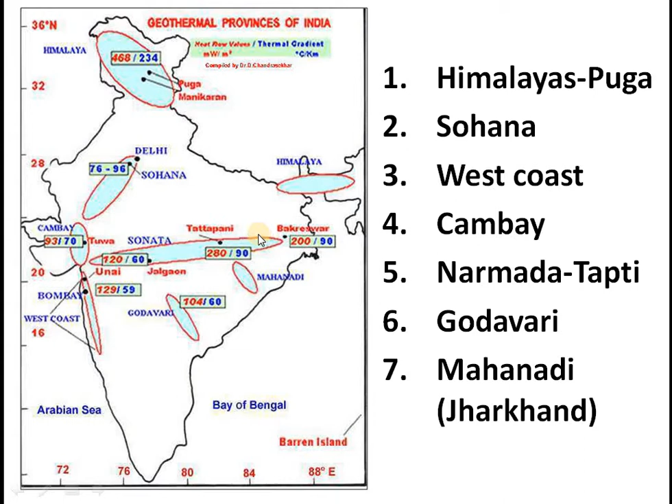And we have Sohana in the Rajasthan region, Rajasthan Maharashtra border. And West Coast is again in the Maharashtra Arabian coastal belt. Cambay lying in between Gujarat and Maharashtra, and this is a bay actually. And the Narmada Tapi region, that is shown as Sonata here, and the Godavari region, Godavari Valley lying in Andhra Pradesh, and Mahanadi in Jharkhand. So these are some of the areas which are very important from the geothermal point of view, and it is shown here more clearly.

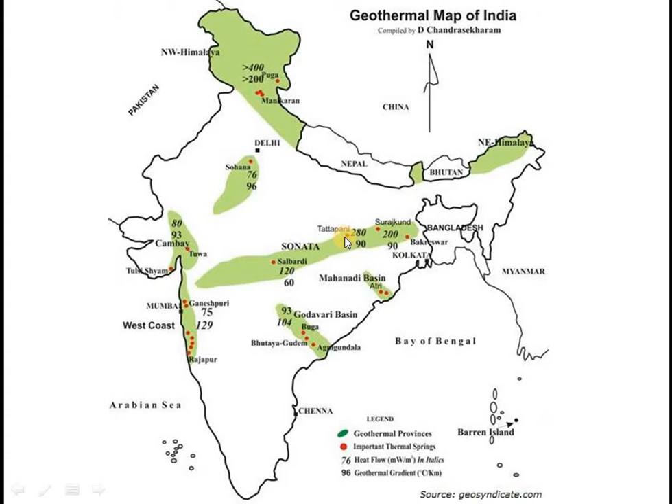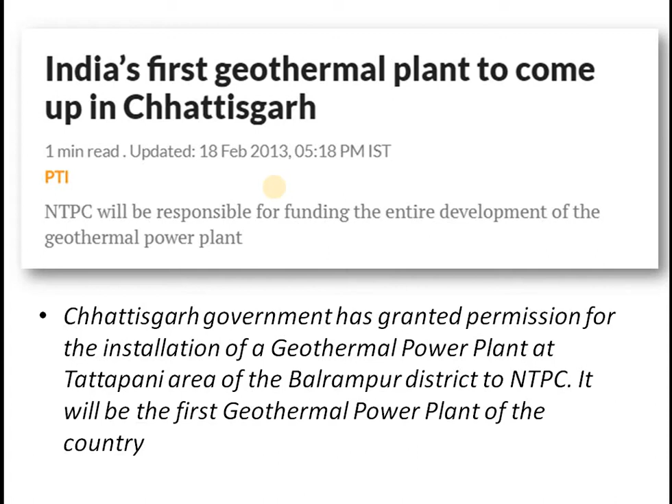And the most important one is in the Ladakh region, Himachal Pradesh area, and in Jharkhand also we have very important, where potentially one geothermal plant is shortly coming in Chhattisgarh. You see, India's first geothermal plant is to come in Chhattisgarh. Chhattisgarh government has granted permission for the installation of a geothermal power plant at Tattapani area of Balrampur district to National Thermal Power Corporation. And it will be the first geothermal power plant. It is around a 600 megawatt project, a very huge one, and the working is underway now. Likely to be finished in the next couple of years. That will become one of the major prestigious geothermal power plants. So that is interesting news for us.

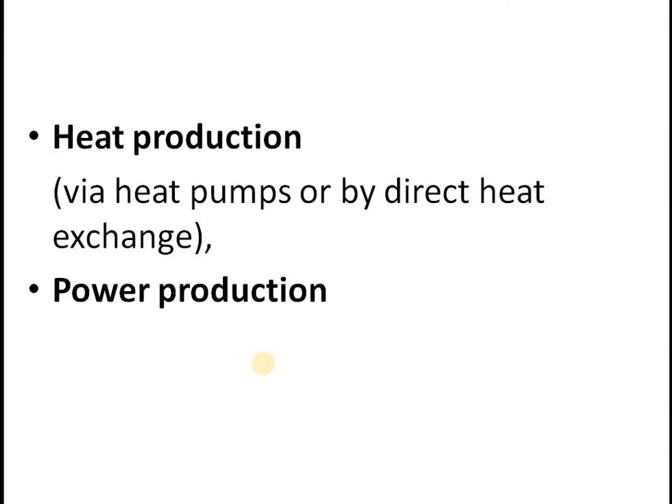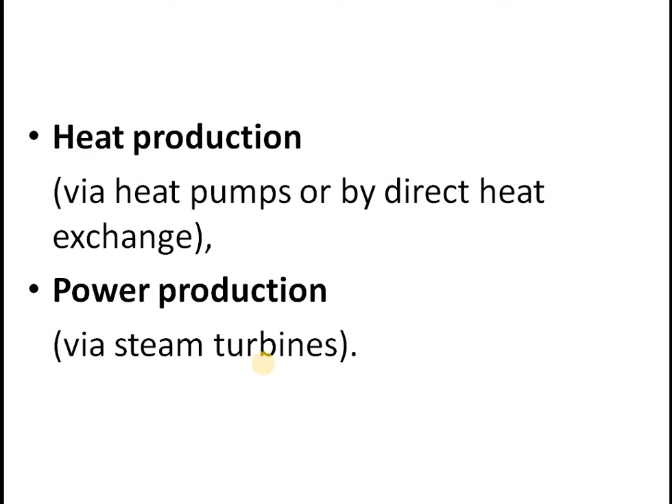Now come to the application part of geothermal energy. Broadly, you can classify the applications of geothermal energy into either heat production for various applications other than power production, and secondly the power generation. So heat can be used in different ways other than power production. Okay, so broadly we are classifying the heat production purpose, and that heat will be used for many heating applications other than power generation. And in power production, we will be focusing on the turbine rotation basically.

So the geothermal energy, basically you can classify into three categories from the heat point of view. Very low enthalpy geothermal resources, where the temperature is less than 40 degrees, which normally we find in most of the Himalayan regions in pilgrimage places. Then low enthalpy geothermal resources, where temperature ranges from 50 degrees Celsius to 80 degrees Celsius, and we have high enthalpy geothermal resources where temperature may cross 250 degrees Celsius, which we normally use for power generation. Okay, the other two categories we make use of for various domestic applications.

For example, very low enthalpy resources, which are usually found in the subsoil or near surface aquifers at depths of a few meters to 200 to 300 meters. Okay, these kinds of sources are spread all along the Himalayan regions where most of the pilgrim places are located.

And such a resource can be used for heating, cooling, and producing domestic hot water in individual housing and small buildings. Because in the winter season, people of those places find it difficult to survive, so they use this hot water for heating the interior of the room.

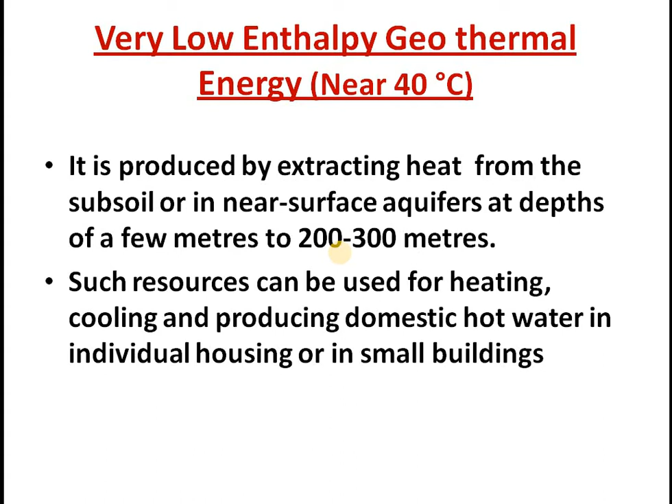And when we go for low enthalpy resources, where temperature ranges from 50 degrees to 80 degrees, that is usually obtained from 1000 to 2000 meters. Depth is again increasing. We can use this heat energy for heating a lot of housing complexes in a vast area, in a vast colony of houses. Requisite heat energy can be supplied from such resources.

And there are many places around the world where people are making use of low enthalpy resources for heating the housing complexes. Not only for heating housing complexes, but many industrial purposes. For various conditioning, the timber industry, the milk industry, the mineral water industry, the chemical industry. So there are so many other industries where they find applications.

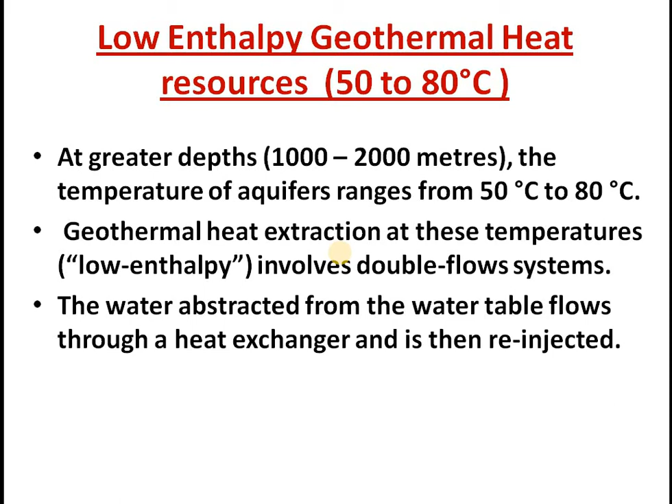Water abstracted from the water table flows through a heat exchanger and is then reinjected. The heat from the water is taken out, and it can be used for various applications. Then the water which is left behind, you can pump or re-inject into the underground tunnels in order to replenish the water supply. Otherwise, water may be exhausted. Water is not perennially available; it may be exhausted. So we need to re-inject water in the soil.

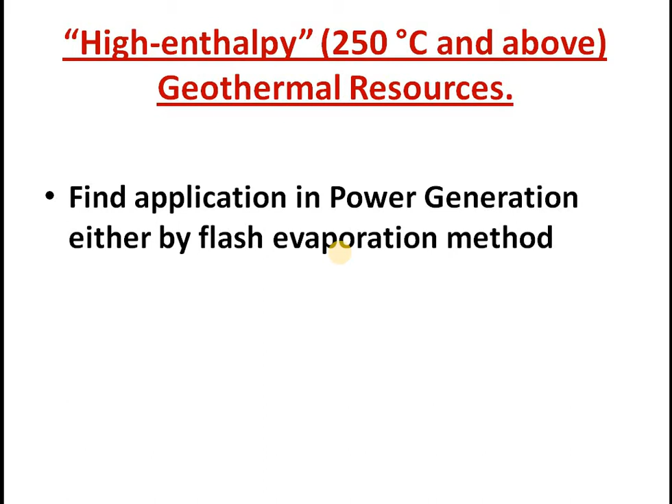And finally, we have the high enthalpy region where temperature may be well above 250 degrees Celsius. That can be used for all the purposes which we mentioned earlier, plus we find application for power generation. And various other industrial applications are also carried out using this water other than power generation.

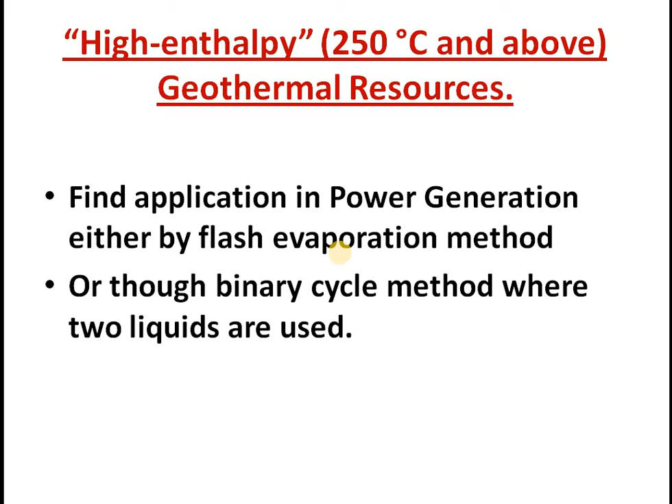We can do flash evaporation, which we already discussed in detail, or we can go for a binary cycle method where we will be using two liquids. One is your hot water. The energy of the hot water will be used to boil and evaporate some other organic liquid, and that organic liquid will be used to circulate and drive your turbine. So this is the primary application, and the same high enthalpy water you can use for various industrial resources. That is what we are going to discuss now.

Various industrial applications. You can use it for bottling of mineral water, because the mineral content of the water that we collect from such geothermal sources is very rich, abundant with various minerals. So such water can find application for medicinal purposes as well as drinking purposes. If you take a bath in such hot springs, you can recover from many skin diseases, because of the heavy sulfur content. The sulfur will enable the curing of many diseases. That is one application.

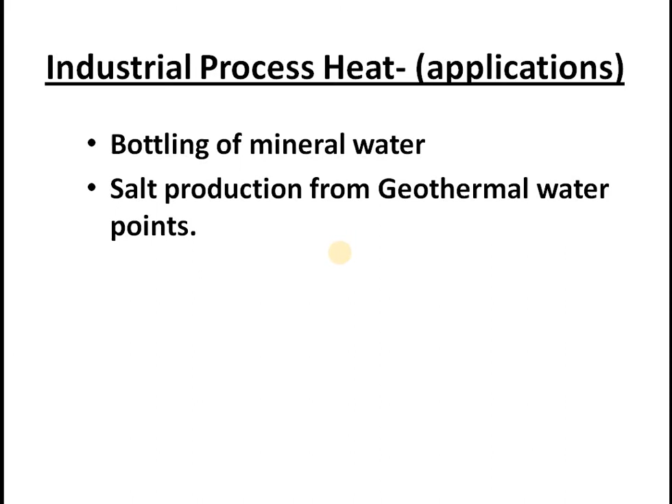And salt production. The salt content in such water will be very heavy. Not only sodium chloride, but many other chlorides and sulfates are dissolved in water in heavy quantity. So once you cool down the water, the salts may get separated from the water. It's a very interesting idea. You can get magnesium chloride, magnesium sulfate, calcium chloride, calcium sulfate, and so many other sulfates and chlorides you can separate. They find a lot of medicinal applications. So that is another industry, salt separation.

Don't confuse it with sodium chloride. Not only sodium chloride, many other chlorides, sulfates and nitrates you can separate from such geothermal waters. From a financial, economic point of view, they have a lot of significance. And the sulfur content is very heavy, just like from fumaroles or a hot spring or any water source near a volcano. They will be abundant with sulfur and sulfuric acid. By a suitable chemical process, you can extract the sulfuric acid from it.

And timber seasoning finds applications, because you can keep timber in such chemical water, so the timber gets conditioned and becomes suitable for making various furniture. And dried milk production, milk pasteurization. These are other areas; the dairy industry finds applications.

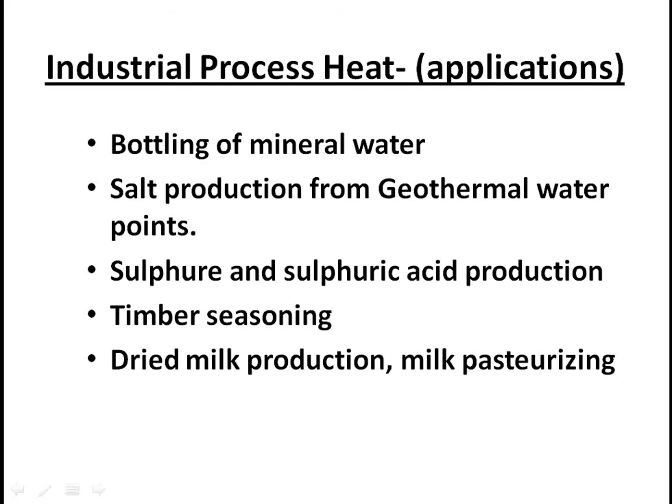And there are various advantages of geothermal energy. Its use is versatile. That means different types of application, which we have enumerated in the previous slide. Okay, versatile, a wide variety of applications. It is cheaper compared to other sources of energy. Of course, that is very clear because it is freely available. We are not spending any money on fuel.

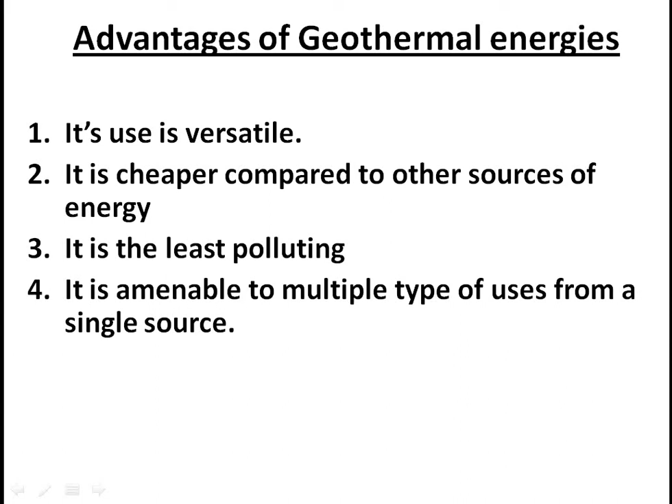It is least polluting. That is very clear. It is amenable to multiple types of uses from a single source. The same water you can use for different applications. Suppose you are initially using high enthalpy water for power generation. After power generation, the complete heat energy is not lost. So the same water you can use for various other house heating purposes, or you can separate chemicals from it, or you can use it for pasteurization of milk. So it finds multiple applications.

And it is inexhaustible in the sense that it shows an eternal nature. Heat energy you can draw out for thousands of years. For example, Manikaran, which you have seen in the video given to you on WhatsApp. Those water sources you have seen in the video have been there for thousands of years. Still there. Many temples, mosques and churches are built around such hot springs, and they have been there for thousands of years.

So that means they are inexhaustible. You can trap the heat energy for the coming thousands of years. So in that sense, it is inexhaustible, provided that you replenish the water supply with sufficient water. You need some refilling technique, refilling technology. That is a must.

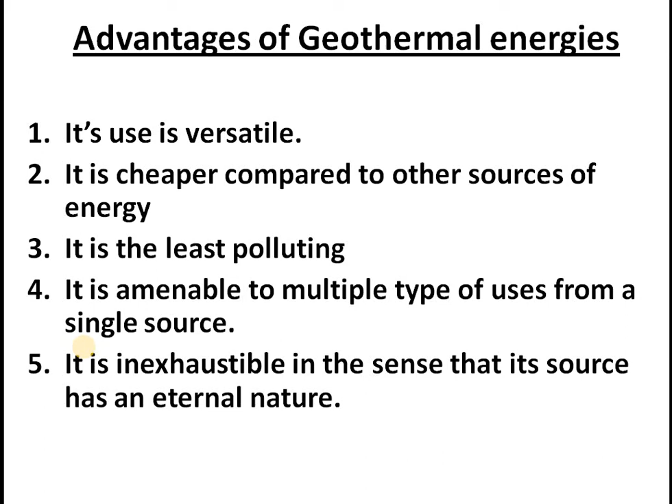With all the advantages, it has some disadvantages too. Let us list those disadvantages. The overall efficiency of power production is very low. Efficiency-wise, it is low. But it doesn't matter much because it is freely available, so efficiency doesn't count for much. Compared to fossil fuel, its efficiency is low.

Withdrawal of large amounts of steam or water from a hydrothermal reservoir may lead to surface settlement, because you are drawing the water from the very bottom. So the bottom gets vacated. So what happens? The top layers may collapse down. That may lead to earthquake-like problems. So what do we have to do? We have to refill, repack it with water.

We have discussed such technology; for example, California has a geothermal plant. What they do is use the purified wastewater from nearby cities to refill such water pockets. Aquifers are filled with such recycled water. So surface settlement can be avoided or minimized in such places.

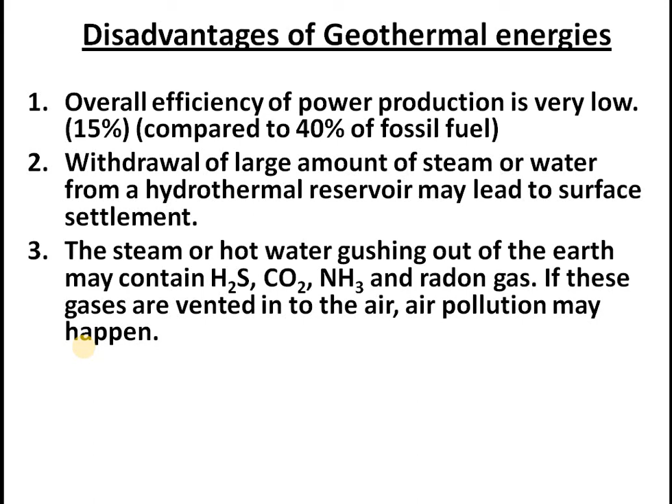Steam or hot water gushing out of such places may contain hydrogen sulfide, carbon dioxide, ammonia, radon gas. These are all poisonous, harmful gases. If these gases are vented into the air, pollution may happen. So precaution must be taken that the water does not come in contact with the atmospheric air. It has to be circulated through suitable safety pipes. That is the importance of the binary system, where water is not exposed to outside. So air pollution has to be taken care of.

Drilling operation is noisy, no doubt. We need heavy, gigantic machines for drilling tunnels, so that's a big problem. Large land area is required for the exploration of geothermal energy. So considering all these factors, still we have a lot of merits for geothermal energy, no doubt. But these are some of the demerits which must be taken care of, or minimized, whenever we go for exploration of geothermal energy sources.

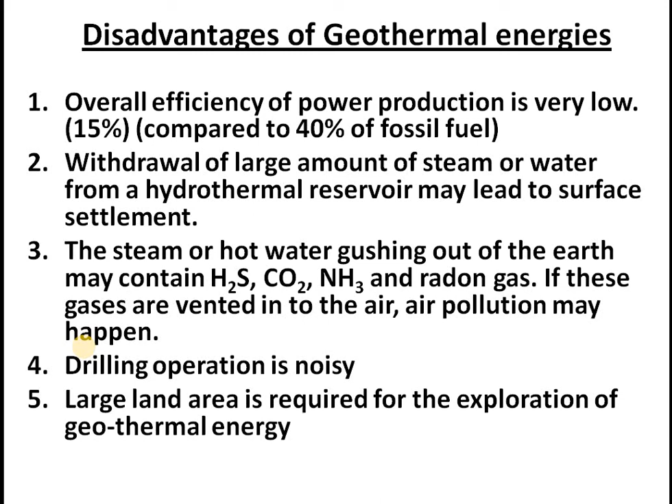So with these remarks, let us conclude today's session. And I want to remind you that we are now concluding this chapter, geothermal source of energy. And next class we will come up with a new module on a new chapter.